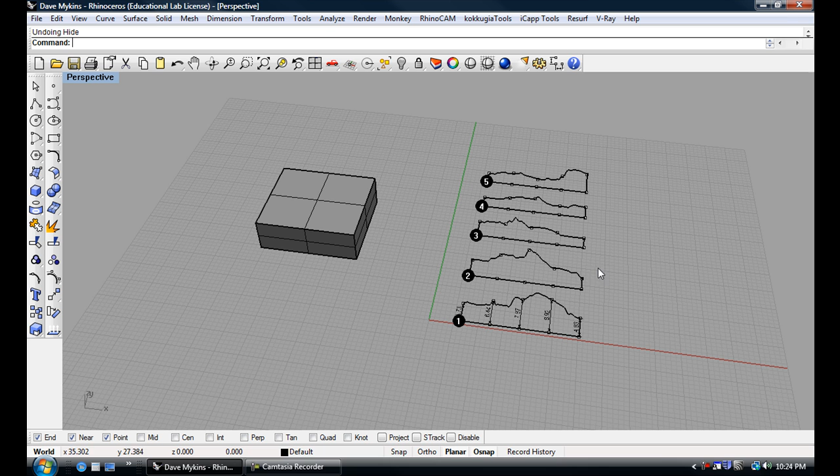So the first thing we want to do with our file setup, we want to make sure that we only see what we want to print. To do that, we're going to take anything else that's in the file, in this case this box for instance, and we're going to hide it.

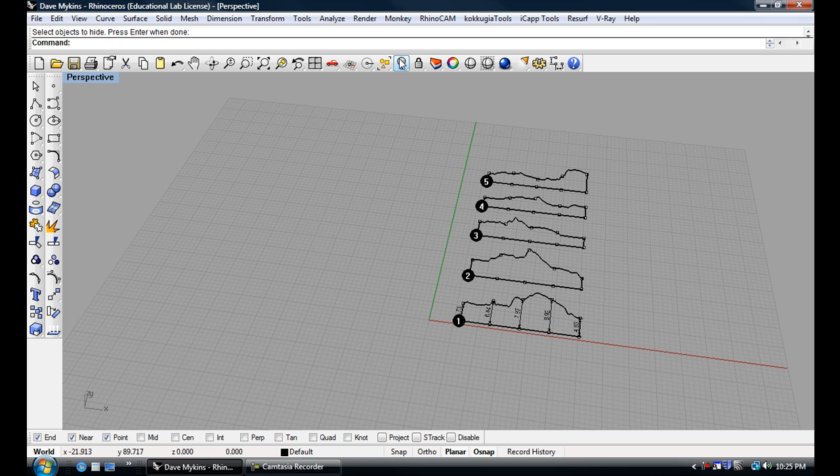So to hide something, you could just left click on the light bulb, and then it asks us to select the object to hide. I press that and enter to hide it. To bring it back, you just right click and it'll bring back anything that's hidden.

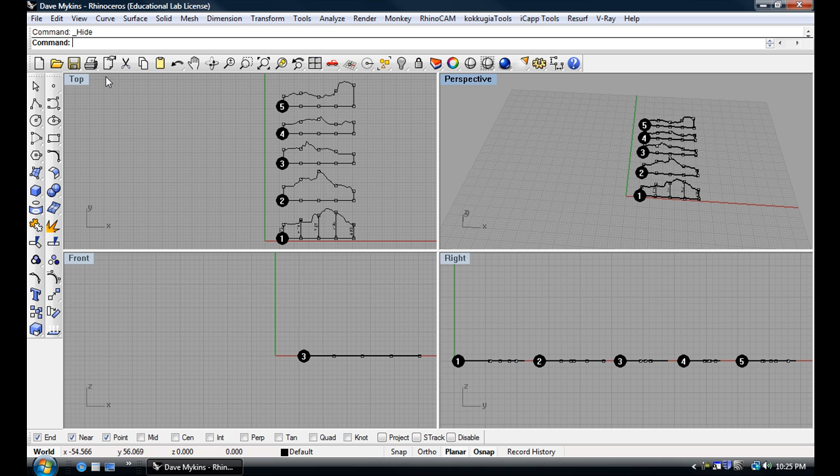You can hide multiple objects as well. If I wanted to hide all of this here plus this, I could just click on the hide, and again when I right click it brings everything back. I'm going to go ahead and hide this, and it might be a little bit easier if I go into my top view, because from here on in we're really just dealing with something that's flat when we go to print.

So to start printing, we're going to go up to our print icon at the very top. Just click on that, and this screen pops up. The first thing we want to do is make sure that our destination is set. If you just click on the destination, you'll want to scroll and find the printer that you're going to be using. In my case, I'm using this one right here, so I make sure that that is set.

The next thing that we're going to do is click on View and Output Scale. You want to make sure that on this drop-down menu, when you click on it, it's set to Scaled to Fit. Now we're going to go ahead and click on Extents. What that does is it brings the extents of everything that's visible in the file into the print view area. So I now have everything visible right here.

If I wanted to get a little bit more out of my printer, I could go ahead and change this from landscape. Because I'm dealing with something that's more or less in a portrait format, I could just select portrait, and although the lines don't look like they've changed, they're going to print a little bit larger on the page. But for what we're going to be doing in general, I suggest we stick with landscape.

The other option you might want to play with is the visibility at the bottom here. If I click on that and scroll down, this is where we could actually view the grid lines as well. So if you're going to be using the grid to dimension things, you want to make sure that's visible. I'm going to just turn that off for now, and I'm also going to collapse both of these areas, the destination and the visibility, so I just have View and Output Scale visible.

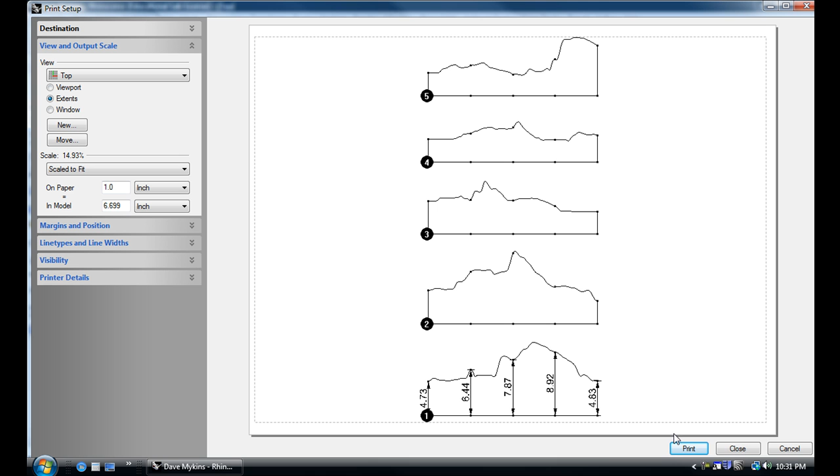So what we're going to do now instead is I'm going to close this for a second. And what I want to do is create a box. I'm going to start my rectangle command, and I'm just going to place this box anywhere—it doesn't really matter to start with. I left click to start it, and it's asking me for the other corner, so I'm going to be doing this in landscape format going across this way.

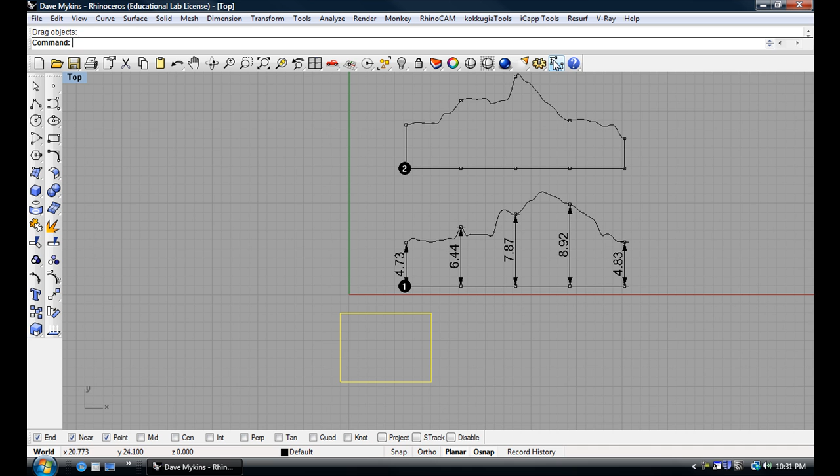So I'm going to type 10, and then for the width going upwards, I'm going to type 7.5. So that's 10 by 7.5—that's my 10, and that's my 7.5.

Now what I'm going to do is overlay this. So this represents my printable area. We're going to use this area to snap to in a second when we go back into our print. I'm going to lay this out, and an easy way to create multiple copies is to use this option right here.

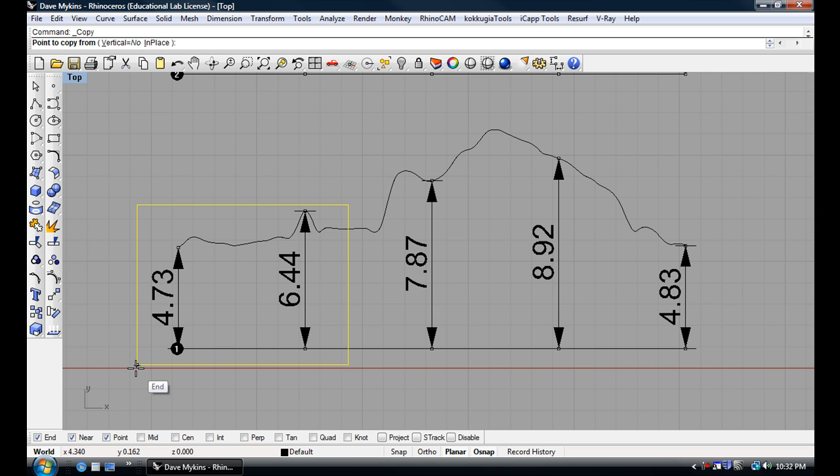It's the copy option. Just left click on that, or type copy at the top to start that command, and it asks for the point to copy from. With my end snap selected, I'm going to snap to the edge of this rectangle and left click, then bring that over and snap to the end of that rectangle, and left click again. I'm still in the command, so I can keep dropping copies, making sure I'm snapping to where I want to be for each position.

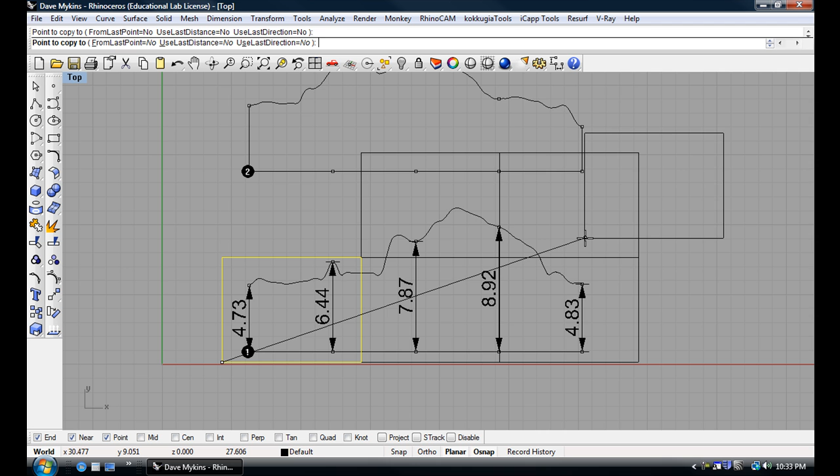When I'm done, when I've got enough squares to tile the whole area, I'm going to right click to end that command. And I'm going to hide the rest of this stuff for now, so just hit the light bulb and all that hides.

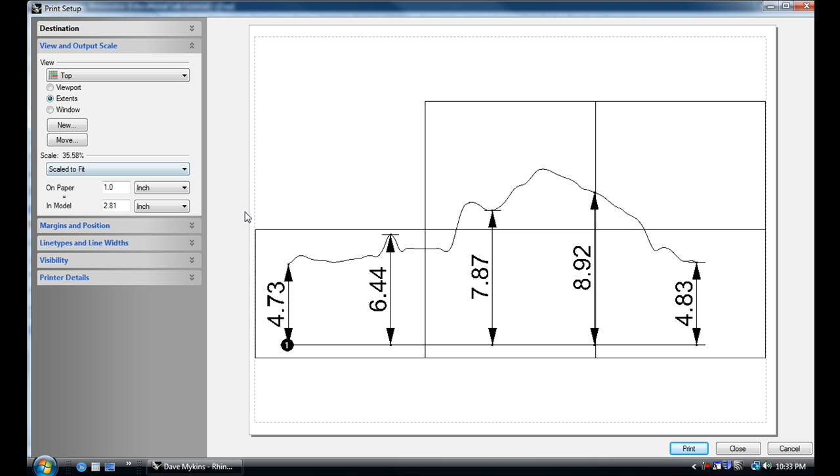Now I'm ready to start up my print command again. I'm going to go up to the printer and start that, and you can see it's remembering my last setting where it's keeping everything visible within the frame. But this is scaled down, and I want to print this to scale. So with scaled to fit selected, I'm going to click on New.

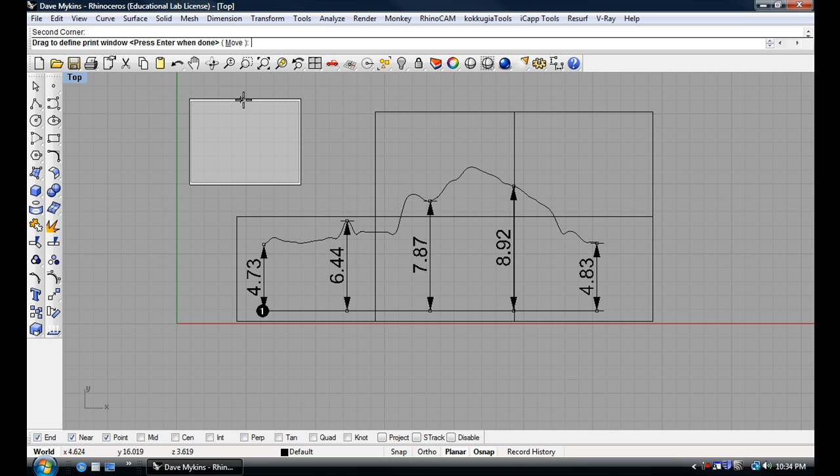It's asking me to drag to define the print window. I could drag anywhere - if I just wanted to start here, I would left click and drag a box, and when I left click again it would create this printable area. What I want to do though is use these boxes that I've just created, snapping to each of them so that things are printable essentially.

So I'm going to do that by left clicking and snapping to the end. When I've done that, I'll press enter to go back to my print view. You'll notice it says scale 106.52, but I want to make sure this is 1:1, so I'm going to select that, and everything decreased in size a little bit. This is now to scale.

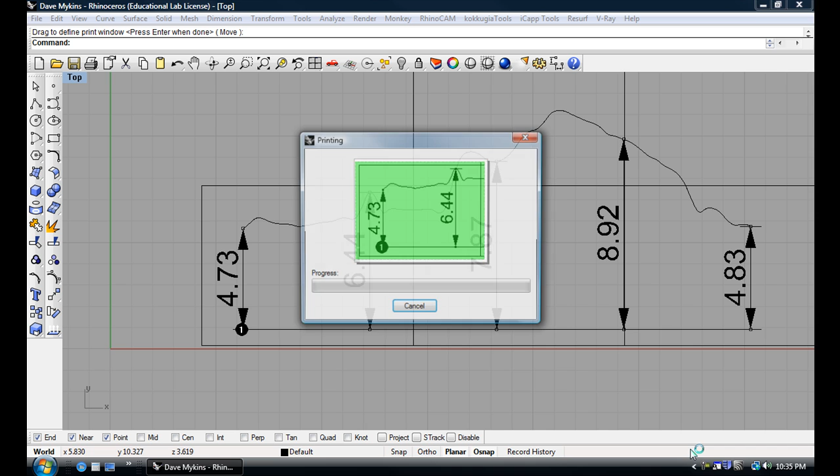I can clearly see my box, and I can see the overlap of the box next to it, which is what we want, because when we print this we want a bit of overlap, and we're going to use that overlap to stitch things together. We'll be taping these pieces of paper together and using that overlap to register things. Once I've done that, I'm ready to print. If I wanted the grid, I'd just select grid here, or not. That's it, I hit print, and it sends it to my printer.

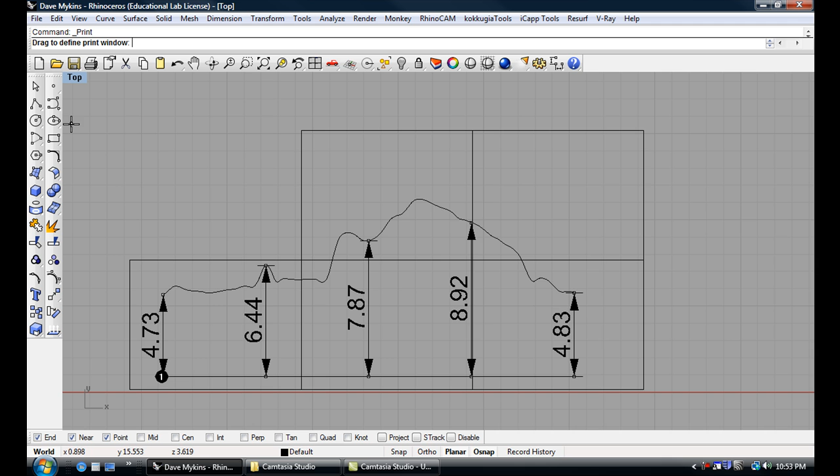Now when I'm ready to print my next section, again I go into print, and I need to make sure I select scaled to fit. Right now this new button is grayed out, so I need to select scaled to fit, and that becomes accessible. So when I hit new, I can now specify my next area.

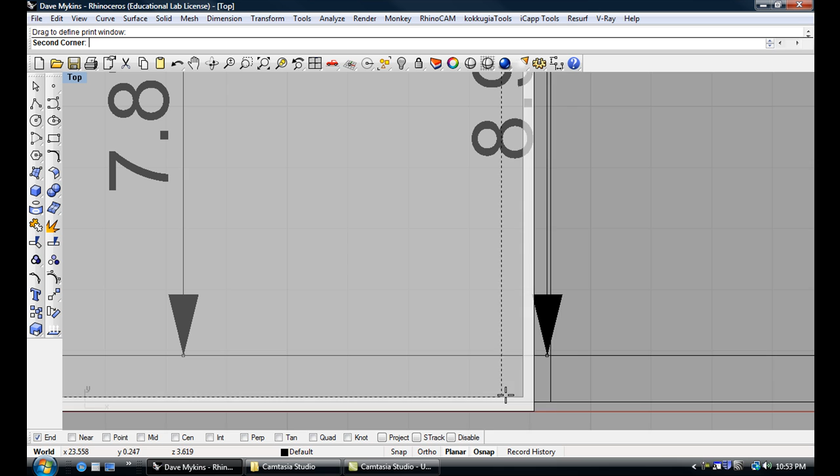One thing to note: when you have your snaps turned on like I do right now, snapping to the end, you'll notice it will snap near this line. I want to make sure I'm actually snapping on the end and not on a point or on the near. It might help to deselect everything except the end, so there's no doubt - though you can still snap to the end of a dimension by accident. In general, you want to pull out so you see the whole sheet, and that way you're guaranteed you're getting the area you want.

And again here, I just make sure this is set to 1:1 so that it reads 100%, and that's my printable area.

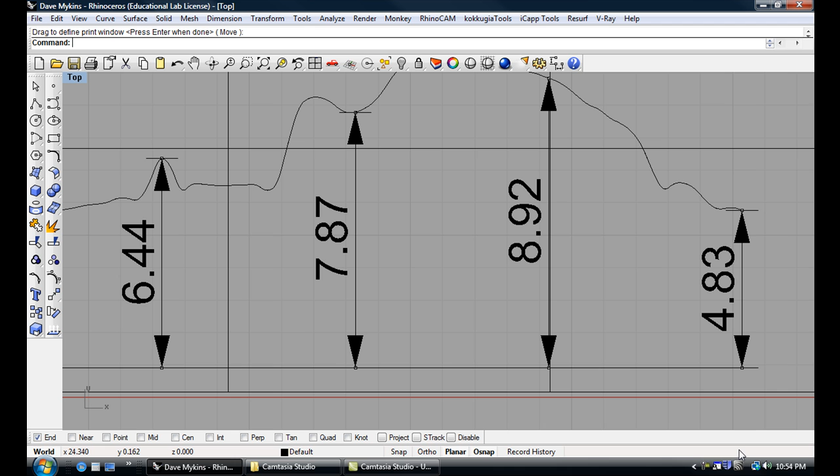So in all this, the most important thing to remember in this dialog is that before you go to print, this needs to read 100%, and that'll ensure that the units in your file are the units you're actually printing in real life on paper.